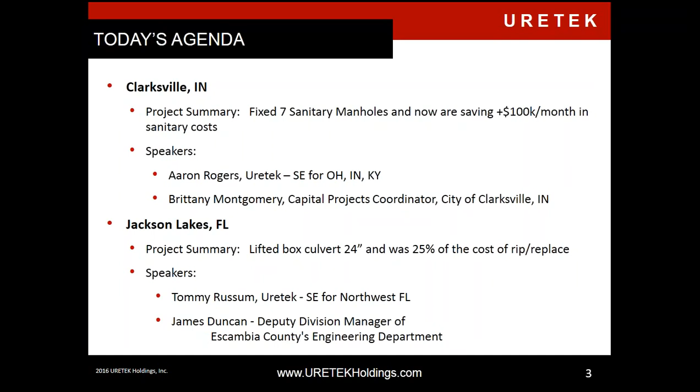Before I hand it over to Aaron Rogers to talk on Clarksville, Indiana, I want to just kind of give a brief intro on URETEK Holdings, who we are, and really what we have been focused on as of late. We are a contractor who does work in the infrastructure, commercial, residential, government markets. We are headquartered in Florida, and we operate in 31 states. What we've really been focused on as of late, it seems, and we hear it every day.

Just on the cover of USA Today yesterday was talking about how 2,000 different municipalities are impacted by lead. And then you can hear different stories about the aging infrastructure. So there's just a lot of news in the aging infrastructure taking place, and so we have found that to be a great opportunity for us to provide our solutions to help customers really spread their money further.

So instead of doing a remove replace, they can look at doing a rehabilitation.

So in working with our customers, we have found this inside outside approach to be the right one, where for a long time many customers were just looking at relining of the pipe or just treating the inside of a manhole. Many of you on this webinar may have seen this exact article from Trenchless Technologies before, because it was a project of the year in March 2012.

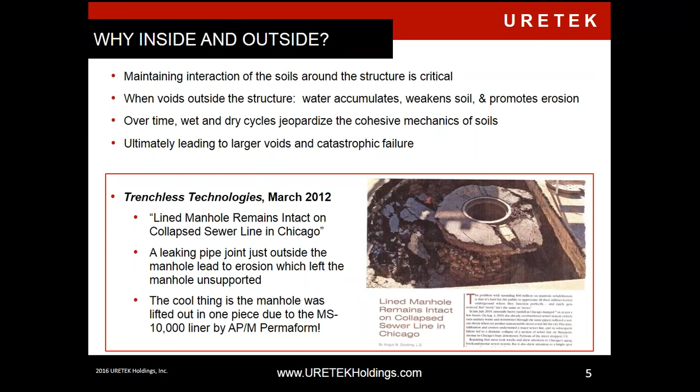The manhole in Chicago was relined with permacast, which is a solution that we offer. It is a 10,000 psi cementitious liner that was applied to the manhole, but because the outside of the structure was never taken care of, the structural integrity had compromised. You can see what happened in the picture. The soil envelope around the structure collapsed. So we have been really working with engineers, municipalities to go after infrastructure and take care of both the inside and the outside.

If you participated in our last webinar, this will be a brief recap, but for everyone else, I do want to share this slide. It is data points like this that is making us passionate about going after the infrastructure market.

George Kurz, an independent consultant, spent numerous years recently taking daily reports from different cities in Tennessee and came to the conclusion that 44% of the sanitary flow is actually inflow and infiltration.

He presented a variety of graphs showing how this flow was tied to rain as opposed to usage. The data continued to show that inflow and infiltration was going through the sanitary lines, making up 44%, which is a significant amount of money that then involves taxpayers having to pay for resizing sanitary lines or increased pumping rates.

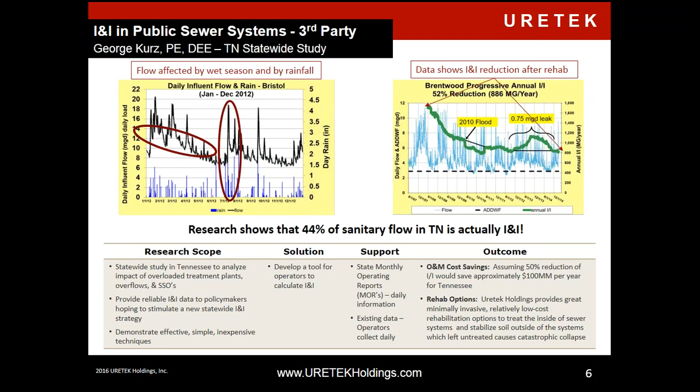Because of this water that should not be there having to be there, we will solve these different problems with a variety of methods. I'll give a brief overview of them, then we'll dive into these projects.

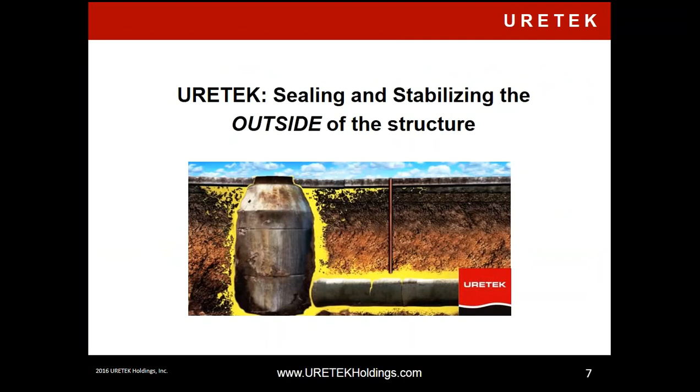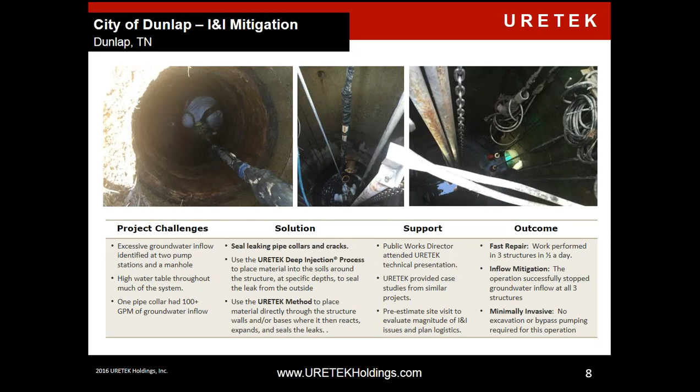Here's a recent project we've done in Dunlap, Tennessee, where we were able to take care of 3 different structures in just a half day's work. They've had significant reduction in their pumping costs as well, as we'll hear very briefly from the city of Clarksville. We've even had other infrastructure projects that have been just a nuisance to individuals.

In Chicago, Illinois, we took care of a tunnel that was having water coming through the joints. Using the chemical grout, injecting from the inside of the tunnel, we were able to stop their water inflow.

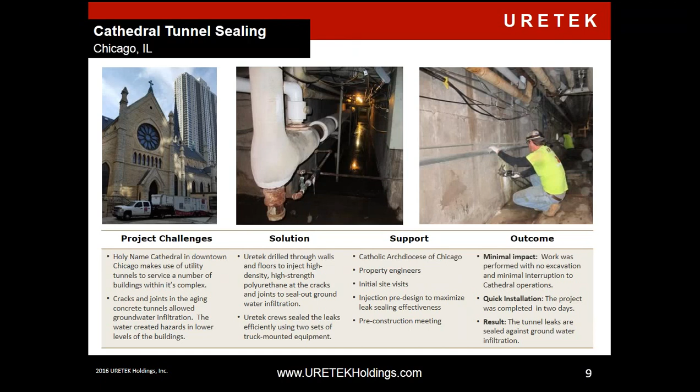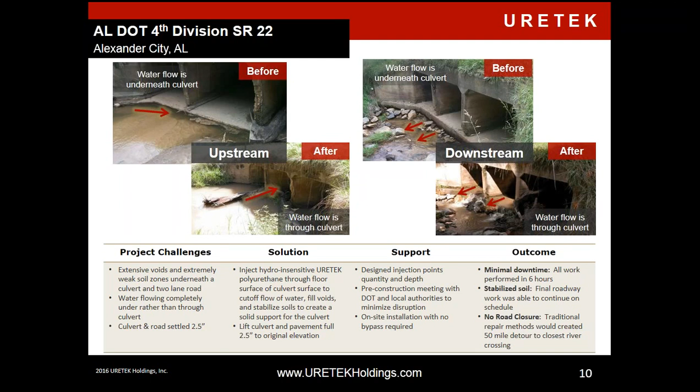By using chemical grout to create an injectable barrier at the entrance of this box culvert, we're able to get the water to go where it needs to go. Our material, due to its light weight, can also work in very old infrastructure, such as brick manholes.

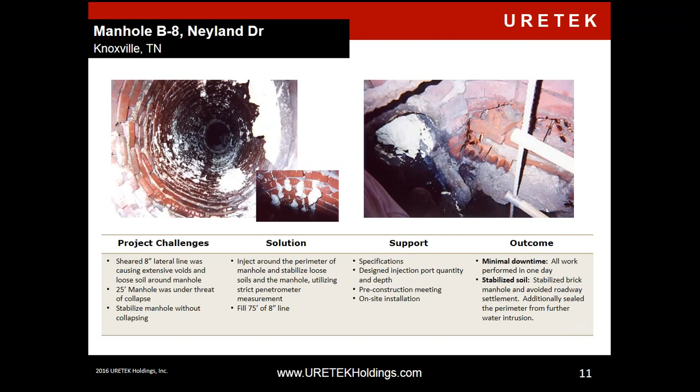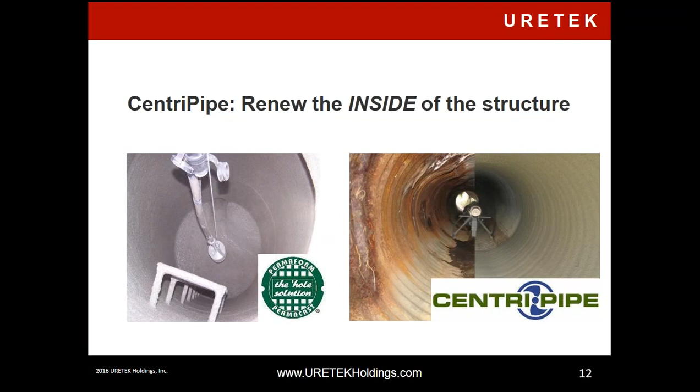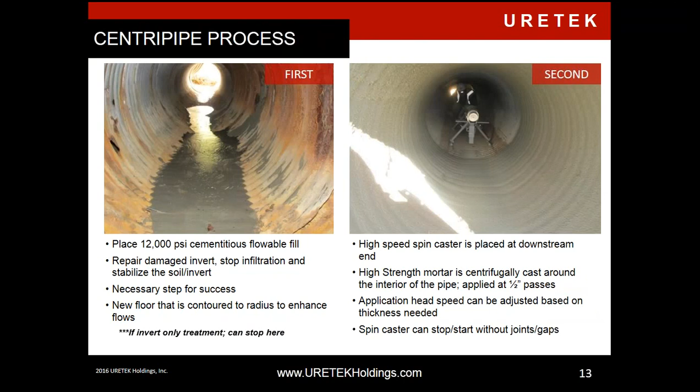We'll treat the invert, as shown in the picture on the left. You can see how we've treated the invert, giving it structural integrity back, and then we can either use a spinner or hand spray application to apply the mortar.

Recent project: we partnered with a company called Baker-Klein Engineering and worked on the Jacksonville airport, where we took care of the manholes and the I&I that was taking place there. We used a grout to take care of the I&I, and then used our Permacast to restore the inside of the manhole.

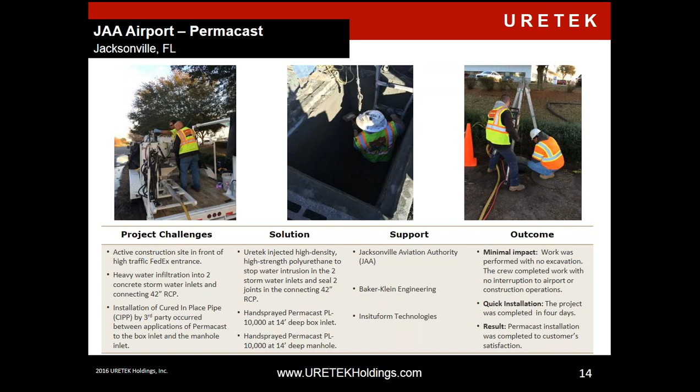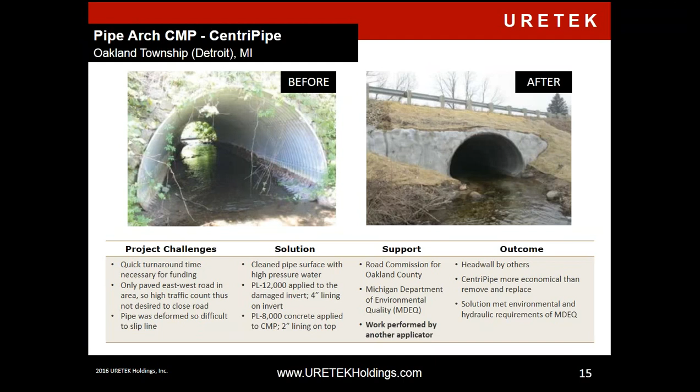The last item I'll mention before I hand it over to Aaron Rogers is Inversa. We showed some solutions for the outside and inside of what you can do once you know you have a problem. But we've partnered with a company, Inversa, who has brought to market technology like a CAT scan you'd see in a hospital.

They've basically brought that to the civil engineering world, where they can literally see through pipes using a CAT scan process. With Inversa's technology, you can partner with municipalities and even consultants helping municipalities to assess which pipes need to be rehabbed versus removed and replaced, allowing for a prioritization of asset management.

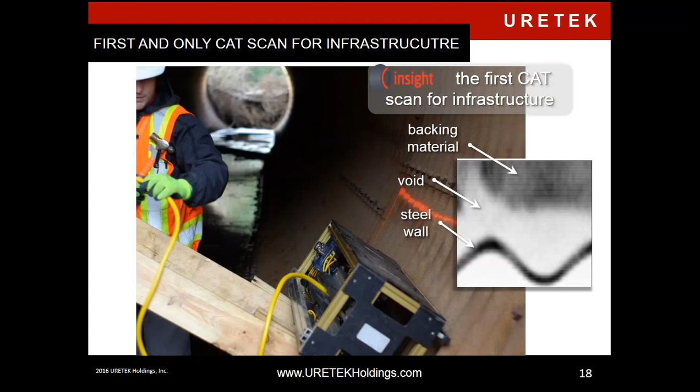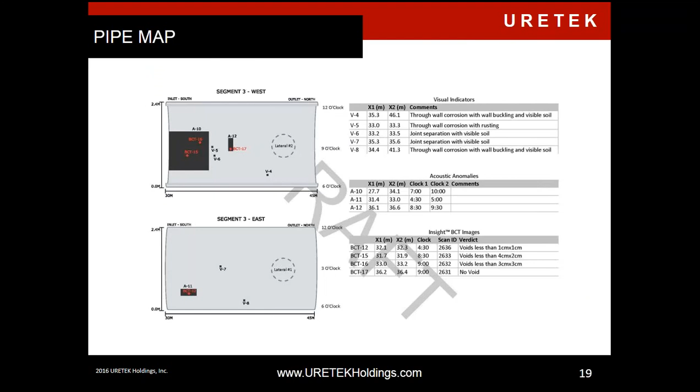Inversa will then put together a map of what the pipe looks like, areas that are a concern and areas that are not. The municipality receives this map along with CAT scan pictures like this one. If you look at the picture on the left, there's no void, no concern in that area, but then you can start to see the transition to a void, and then the actual void itself. That wavy line is the corrugation of the corrugated metal pipe, and you can see there's a large void right there.

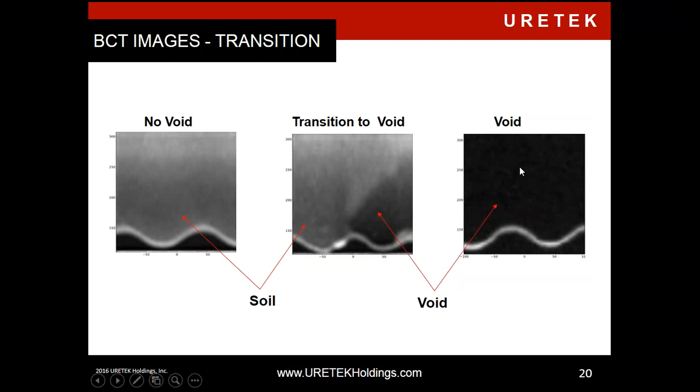We'll be talking about that on our next webinar, May 6th, which we'll cover at the end. Now I'd like to hand it over to Aaron Rogers, who will be talking about the Clarksville, Indiana project.

Morning, everyone. Like Corey said, my name is Aaron Rogers, and I was the project manager for a project we did just north of Louisville for the town of Clarksville. We reduced I&I and had some really great outcomes with that, so that's the purpose of this section of the presentation today.

I'm also the sales engineer for URETEK Holdings in the area, and today we also have Brittany Montgomery on the webinar. She's the capital project coordinator for the town of Clarksville, and was the point of contact and project manager throughout this project. I'm going to talk about the construction portion, and Brittany is going to cover the whole project from the city's perspective—costs, other solutions they looked at, and the outcome and finances. So we're going to start with Brittany. Brittany, I'll go ahead and pass it over to you.

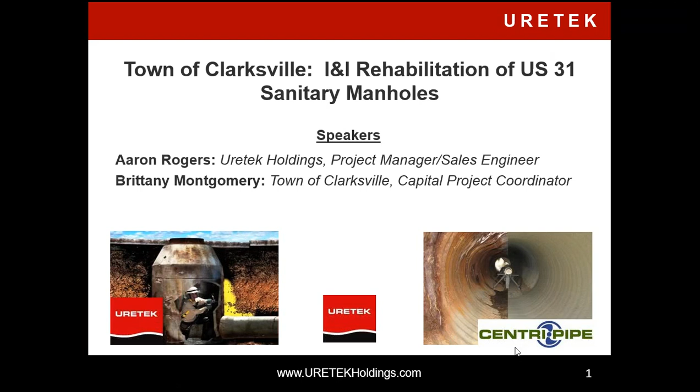Thanks, Aaron. As Aaron just said, my name is Brittany Montgomery. I'm with the town of Clarksville, and I manage capital projects on our utilities and such.

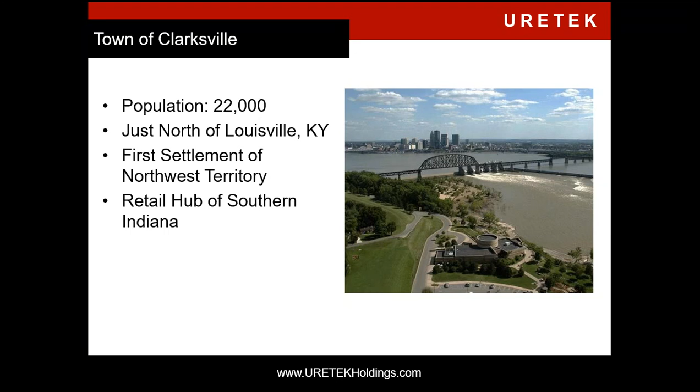So real quickly, an overview of the town of Clarksville. We have a population of about 22,000 people, and we're literally just north of Louisville, Kentucky. This picture shows our river view of the city of Louisville. We're relatively small in population compared to our retail sector—we're considered the retail hub of southern Indiana. While our population is about 22,000, on weekends we serve a population that quadruples to closer to about 70,000 due to our retail sector. The other interesting thing is that we're the first settlement of the Northwest Territory, the first settlement north of the Ohio River. So we have a long history and a lot of very old infrastructure, but also a lot of new development we have to continue to work with.

Just a quick overview of our wastewater treatment plant system. We have a plant that was built in 1985, and we just replaced it this past year—in June of 2015, our new plant went online. It's one of the last trickling filter plants in the state of Indiana. Our average daily flow through the plant is right around 3 million gallons, typical for a community our size. However, during rain events we would hit a peak of about 12 million gallons and overflow into the residential neighborhood across the street out of manholes.

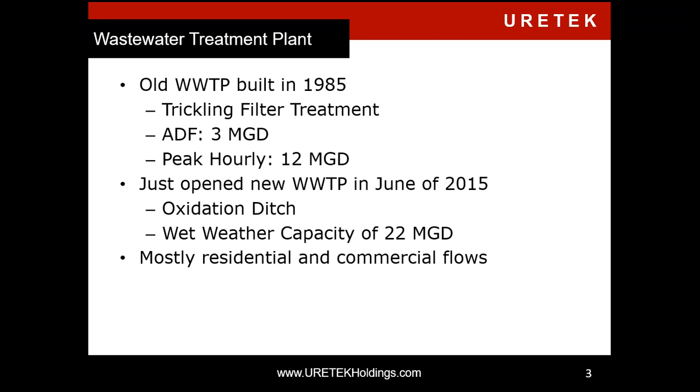When we opened our new plant in June of '15, we went to an oxidation ditch—much cleaner water, better ability to treat wet weather—and we also went to a wet weather capacity of 22 MGD, officially rated. Within 12 hours of putting the new plant online, we got a massive rainstorm and actually put 24 MGD through our plant, the first time we'd ever done that without overflowing. We don't have any industry—our last industry left in 2006, so we're strictly residential and commercial flows. We have your typical warehousing and such, but we don't have a need for pretreatment or any real industrial facilities to worry about.

Our collection system is typical for the Midwest. We have 72 miles of lines. We are very flat, except for the areas right at the river. So we have 35 pump stations. We actually operate on a header system where one pump station pumps into a different one, and we have 3 main pump stations that then pump into a joint gravity line that flows directly into the plant.

Our system's old. We do not technically have a combined sewer system. We have separate sanitary and storm systems. Those were separated out when the initial wastewater treatment facilities came online in the 50s. Most of our lines are clay. We do have some concrete and some PVC in our newer developed areas.

But I would say about 60 to 70% of our lines are the old clay lines. Our smallest lines that the town actually will take care of are 8-inch, and our largest lines are 36. The average is about 8 to 12, except for more of our collectors. Our lines range in age. We have some that go back to more the initial development of sanitary sewer systems that are 100+ years, that when they separated everything out, continued to stay in line. But our average age is about 40 years. So we are facing the same thing that every other older community in particular faces, in the fact that we have old lines, a lot of I&I problems.

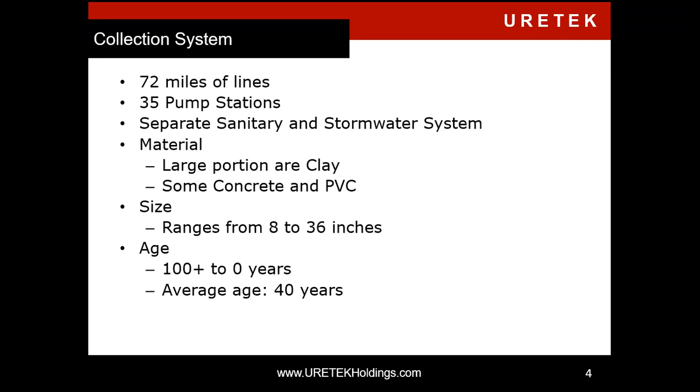And I'm going to focus in particular on the area that we're going to be talking about where we did these repairs through URETEK. In 2007, the town started to notice increasing high levels at what's called Pump Station 10. Pump Station 10 actually has 5 different pump stations that go into it and service areas that go into it. But the issue with Pump Station 10 is it's a very rapidly growing retail area.

This is an area, and it continues to grow today, where once a month we have new retail open. We have Walmart open, we have Target, we have Bass Pro come on. And suddenly the town itself was approving capacity letters for these new developments, but during heavy rainfalls we are seeing consistently high levels at Pump Station 10, and we are seeing consistent basement backups in areas in the neighborhoods that surrounded this development.

A study was commissioned by HMB Engineers, who are a local engineering firm, mainly in the Louisville, Kentucky area. And their results came back and said, you need to construct a new pump station. They don't know where the flows come from, but there's just too much flow, and you need to construct a new pump station and take some of the flow away from the current system and put it directly into the plant. However, as many communities at the time, our rates were very low, and the cost was not something that the council felt like they could move forward with.

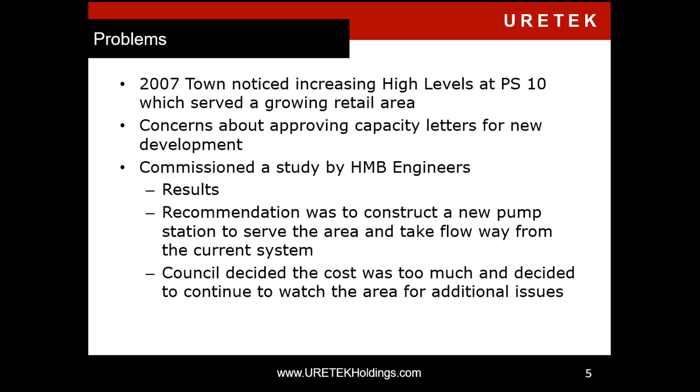However, we continued to have problems in the area, and not just in that area, but throughout the town. As you could see before, during real dry days, we'll actually just put 2 MGD through our plant. We just don't have that much flow. But during rainy events, we will put 12, and then we come out. We had some pump stations that were seeing a 500% increase in our flows during rain.

And IDEM, which is the Indiana Department of Environmental Management, handles all permitting on behalf of the EPA in Indiana, started putting pressure on the town. You've got to do something to reduce your overflows. You've got to do something.

Ironically, in 2011, the town was hit with a massive flood event, which caused our effluent line from the treatment plant to the Ohio River to fail completely. Because of that, there was a need suddenly to relocate our effluent line. We had to rebuild, completing the new treatment plant that just went online.

And so the town entered into an agreed order with IDEM. I'm always careful to say we never entered into a consent decree. We never really had IDEM come down or EPA come down and say you have to do something. But because of the continued issues we had with overflows, IDEM snuck into our agreed order this idea that you had to spend $500,000 a year to reduce I&I.

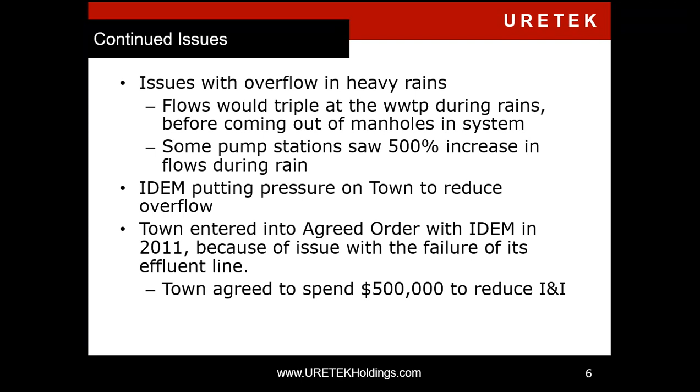We had to go out and we had to start figuring out these problems. They weren't going to let us just kind of scapegoat on it. We weren't really in trouble, but they used this as an option to force the town to really start to deal with the problems in the collection system. And while at the time we weren't real sure how we felt about it, it worked out.

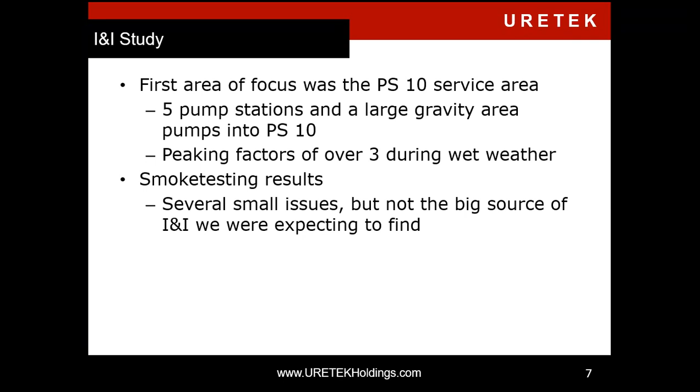Our first area of focus was the pump station 10 service area. That area has 5 pump stations and a large gravity area, and is currently about 80% commercial and 20% residential. During wet weather, we peak over 3. We had the area smoke tested, expecting to find that we were draining a field somewhere or something big, but we didn't find anything in particular. We just kept finding small areas. So we decided to take the next step and do something more.

In the spring of 2014, there was an announcement that additional development was coming. They were going to develop some out parcels as well as put in a new nursing facility and retirement home in that area. At that point, we said we can't continue to sign capacity letters knowing that as more flow keeps going on, we have the potential to cause basement backups in our neighborhoods. We contracted Gripp Incorporated to complete a flow monitoring study. Gripp is a local, Indianapolis-based community firm that does a lot of our flow monitoring.

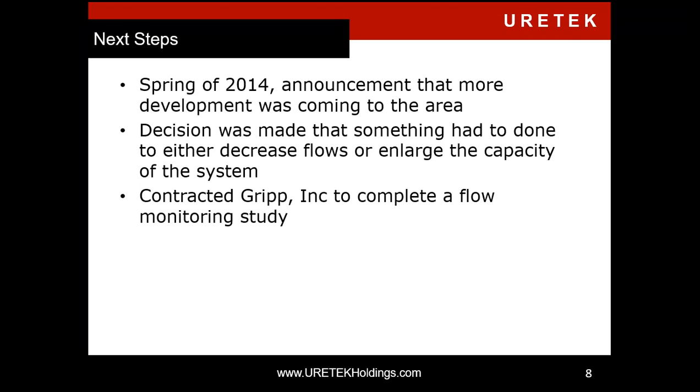So we commissioned the flow study, and we started at pump station 10, and worked upstream, moving the monitors. We used 2 meters at a time. After we get a good rain event, we look at them, then move them again. Just trying to track where it's coming from.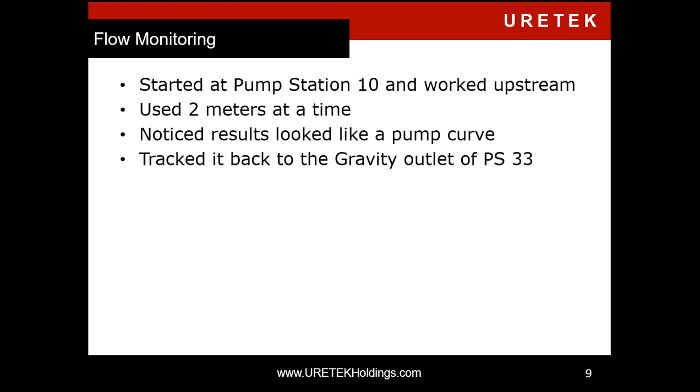What we noticed was it looked like a pump curve, so we were thinking one of the malls was pumping to us. They've got some pump connected, so we moved it past where they would have connected to the system. What we found out was that we tracked it back to the gravity outlet of pump station 33. What we thought was an issue with one of our commercial developers actually ended up being an issue on the town side.

Pump station 33 is actually a station that was built in 2003. It's not an old station, and the line itself is not old. It was built in a swampy area next to I-65, which forms our eastern border here in the town of Clarksville. There were significant problems when the pump station and those lines were actually built. The initial contractor walked off the job and ended up going bankrupt because of the high groundwater conditions.

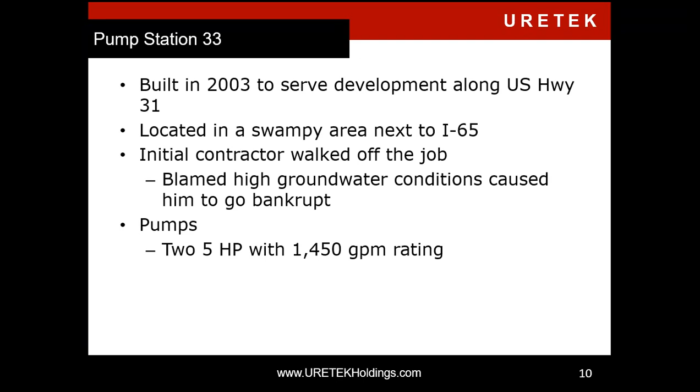When I say we're right off 65, I mean 65 kind of drains. They have 6 lanes at this point of I-65, and it all drains into this area where the pump station was. The pump station has two 5-horsepower pumps rated at 1,450 gallons per minute. We only run 1 pump at a time. So it's a pretty typical pump station, but we had some issues from the beginning just with the lines.

So our next step was to go out and have the line TV'd. Let's TV the line and see what happens. We were really surprised at the results. Overall, the pipe itself was in good condition. However, the manholes and the joints were just leaking.

We had the TV done during a dry period. Things were actually really dry, not spring. You can see that even as the ground was dry, when you get down in the manholes, here's the water just seeping in. It was going 24/7, not just during rain events. So we're like, okay, well, this is our problem. We have to do something to reduce it.

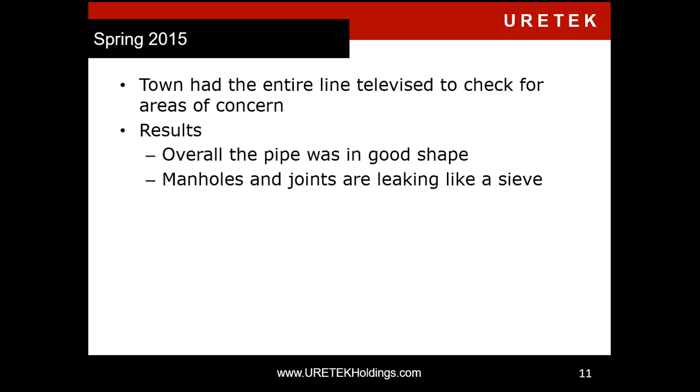The town examined several different solutions. Typically, we would have said let's line the manholes. We got an estimated cost, and it would cost us about $100,000. These are really deep manholes, and we have access issues back there. We actually had a lot of issues just being able to get back there and TV the line because of where the location is. Also, no one could really give us a guarantee based on what they were seeing with the soil conditions that we could line the manholes and not have escape around the liners.

We looked at what happens if we were to move the line from behind the businesses. This is off between Highway 31 and I-65. What happens if we were to move them out closer to Highway 31? Well, there's significant cost with that, and the businesses wouldn't care for that, as well as we would probably have to actually put it in Highway 31, and we'd still have to run a pipe under 65, which is how it gets into the pump station 10 area.

We looked also at just general CIPP. The line itself really didn't need it; we just needed the manholes. So we just got to thinking, okay, what else can we do? There's got to be some better option here.

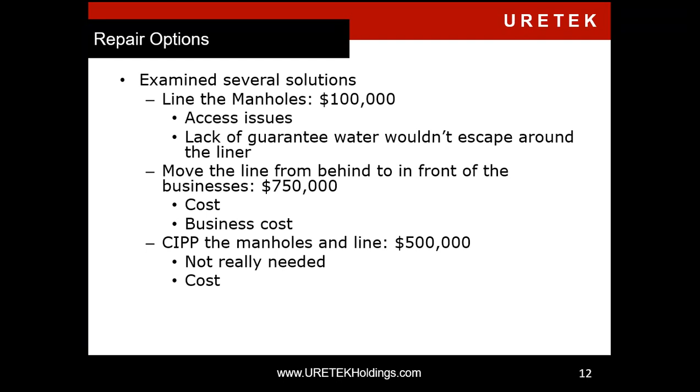Let's see. So the town's engineers, which are HDR Incorporated, they have their Louisville office. They had just had a lunch and learn from URETEK Holdings, and they said, hey, why don't we look at this? So he sent the results to Aaron. He reviewed them and said he thought it would be a good fit.

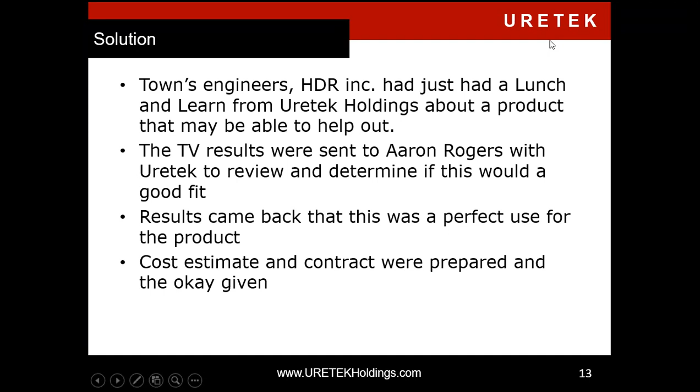And we're like, okay, this has got to be better than any other option. They gave us a cost estimate, and we approved it on the spot pretty well. We said, we've got to do this. What can it hurt? So the contract was prepared, and the okay was given. And we went ahead and moved forward with the repair. I'm going to turn it over to Aaron now to talk about what they actually did, what repairs they did, and how it ended up working. And I'll come back and tell you what the end results were for the town in just a second.

Thanks, Brittany. Give me 1 second here.

There we go. Yeah, so as Brittany said, it was between HDR Engineering out of Louisville and the city of Clarksville. Kind of came together after that lunch and learn and agreed and liked our product and wanted to move forward with our solution. So first thing I'm going to talk about is specifically what the solution was.

So during that expansion, first the polyurethane is traveling into the voids, but anywhere that there is I&I or gushers, that polyurethane still in a liquid form is going to be carried in that flow through the faulted locations in the structure. So because it sets up in about 30 seconds, it actually begins to set up as it gets carried through that faulted location. And what forms is outcroppings of our material right along that fault. And once we see the outcroppings, we know that we now have what we call positive seal, a seal that's now complete all through that fault.

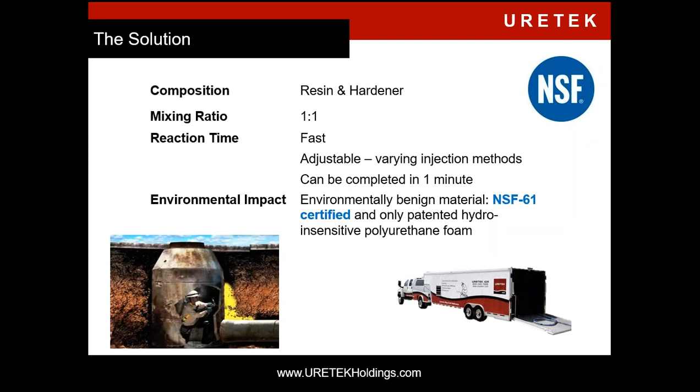And a really important characteristic of the material for this job was that it's hydro-insensitive. That just means it's going to behave the same way in a bone-dry condition as it does in a saturated condition, or even beneath the groundwater table. So obviously with I&I and working around voids in the manholes, very critical to have that. And it's also NSF 61 certified, which means you can use it around drinking water, which also means it's environmentally inert. And another piece that made the solution valuable was that we didn't have to bypass. We can do this with flow still in the system.

So the project itself, basically we were given the CCTV results, as Brittany said, from the town, and we used that to design our solution. If you look at the table at the top of the slide, you can see all the manholes that we were going to treat. So there's 7 manholes, described as either major or minor repairs. A column over, you see the dimensions. They're all 4 foot in diameter, but they're mostly deep. There was a 12 foot and a 7 foot, but everything else was 17, 18, and then 21. And 21 was the one right next to the lift station.

And then the repair types, there were 2 defects that were in almost every manhole. Number 1, the precast joints, and you can see that in the picture in the bottom right. Water was traveling through there, creating gushers. And the second defect was the pipe joint, the intersection between the 12-inch sanitary PVC line and the precast concrete manhole structure.

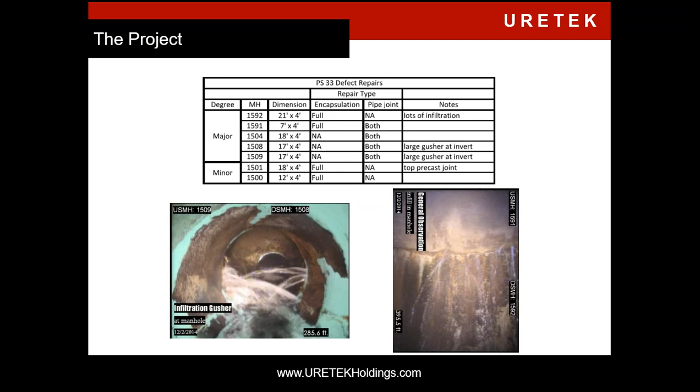And the picture on the bottom left corner, this is the CCTV going upstream in the line, coming right up to the actual manhole. So you can see right at that joint the high pressures of that gusher. And again, the reason we got high pressures and large gushers is we have a high water table and deep manholes. So hydrostatic pressure builds up.

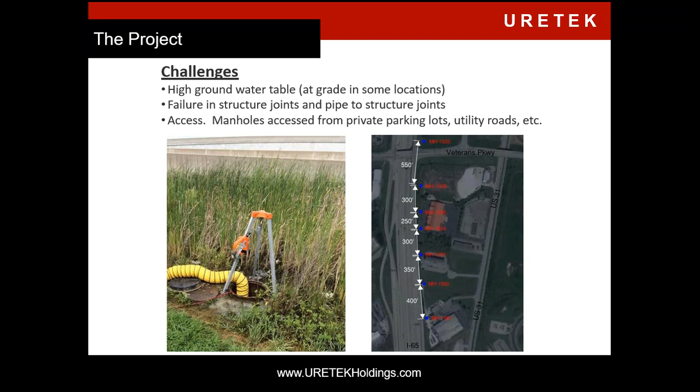And then really the most challenging manhole we had was the one that was second to the top of that picture. You can see it's the only one that doesn't have a business development near it, but you can actually see the utility access road. So we had to use that, and the edge of that was in the swamp, and we had to get real close on the edge and kind of maneuver the truck around so that we were able to access that manhole. But our construction crews did a great job and got our truck back, and we were able to completely access that manhole.

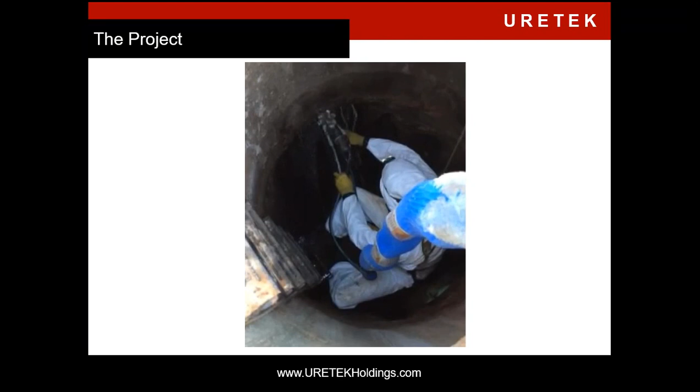And this is a video. So yeah, if you look, you can see the I&I coming through right where the gun is inserted into the wall. And what we're doing is injecting the polyurethane behind that wall. It's filling the void and starting to seal. And you can already see the flow is reducing. And keep an eye on the 7, 8 o'clock position on the ladder area.

What you'll see is I&I begin to form there, because what happens is, as you can imagine, water takes the path of least resistance. So as that happens, you're going to get new locations of I&I. So we always recommend to clients to encapsulate the full manhole with polyurethane, not just seal the one joint. And that was the case of what we did on all 7 manholes, was encapsulate the entire manhole, but you can really see it spraying now.

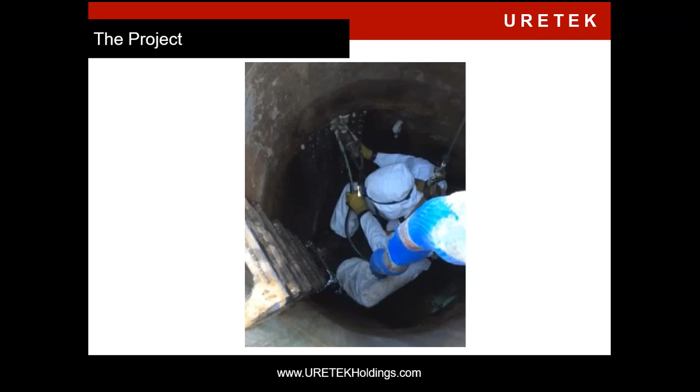And then just to describe a couple things in the picture there, you can see obviously our operator, and he is on a pulley system, and you can see the gun is inserted into the wall, and you can actually see the two separate tubes coming into the gun. Those are the separate materials, and that just gives you an idea of what the setup is here. And this was actually in the deepest manhole, but ironically, the gusher is only about 4 or 5 feet from grade.

So a couple before and after pictures here. On the left, you can see at the invert, this is a lateral to manhole connection. You can see that we were able to completely stop that flow. And then the pictures to the right, before and after, this is actually the same exact joint that I just showed in the video. And what you see in the after picture is the outcropping, and I wanted to include that so you can see what it looks like when we get that outcropping and we know we have positive seal. And we clean that up before we move off site.

So the work was completed in a day and a half. We did successfully stop all of the precast and lateral to manhole joints, all the I&I. And we didn't have to bypass pump, and actually we finished this project under budget. So I'm going to pass this back over to Brittany, and she's going to talk about kind of the outcome for the town as far as cost savings and different things like that.

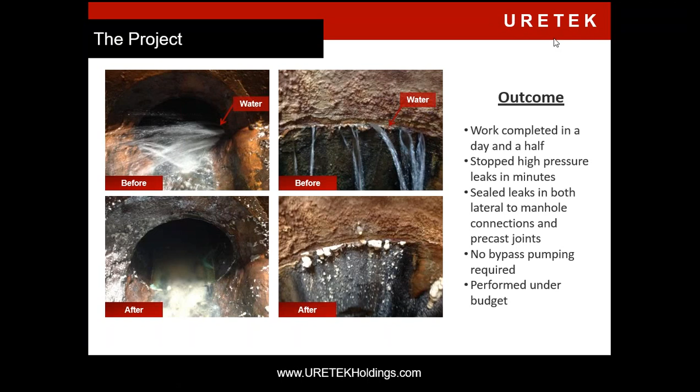Thanks, Aaron. I'm just going to finish up the presentation by telling you what our costs were and then what we saw in our savings. The total cost to the town was just under $75,000. Our largest cost was the flow monitoring cost, and that's because we were flow monitoring for about 4 months, and that's some significant cost. We don't have all those capabilities in-house. So those were at $54,000.

Our engineering: we paid HDR to look at some of the options and also to provide the information to Aaron and all associated oversight of that. It was just around $4,000. And then our actual URETEK costs were $16,306. So think about that. $16,000, as you guys know, you can't really do a point repair for that. We were able to fix all of our problems. As Aaron said, it came under budget.

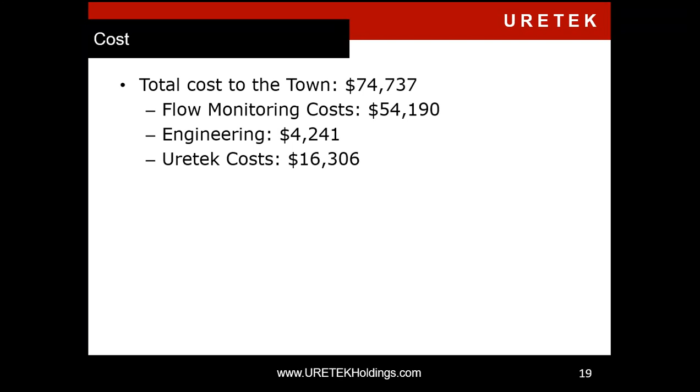Initially, we were thinking it was going to cost between 20 and 25, but they bill us based on what they actually do, which is nice. And so it came back and ended up only costing $16,306. And we were taken aback. After we got all these costs together, the next step was, let's see what really happened. Do we see any decrease? And it was immediate. We did this work in the summer of 2015, and we saw an immediate decrease.

We had a rain event not too long after, and suddenly we didn't have the high levels at 10. We didn't have the high levels at 33. We were wondering, oh my goodness, this is amazing. So then we went back and did the math, and what we saw was a decrease of over 10 million gallons a month being pumped. We don't have flow meters on all of our pump stations, so it's based on our hour meters. But we compared the same time frames exactly, and we also compared wet weather versus dry weather, and saw a decrease of 10 million gallons at both of the pump stations.

We were just amazed. I'm not going to lie, we presented the information to the council, and they said, we need to double check these. So we had an outside engineering firm look at the data, and it was right. We based our cost savings on what we charge our customers, our regular metered rate. We estimate it saved us $94,000 a month, and that's just based on the water treatment side of it. We also no longer had the need for a new pump station to service that area. That need is gone. We have adequate capacity on the system.

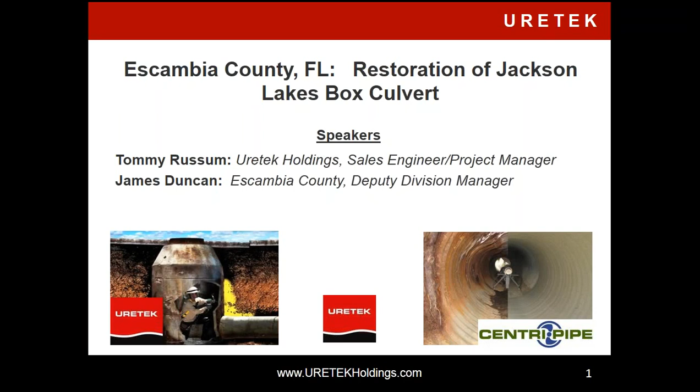Escambia County is the westernmost county in the state of Florida. They have a population as of 2013 of about 305,000, and it was one of the first counties, along with St. Johns County, in the state of Florida, back on July 21st, 1821. We are also home of the Blue Angels, which is pretty neat.

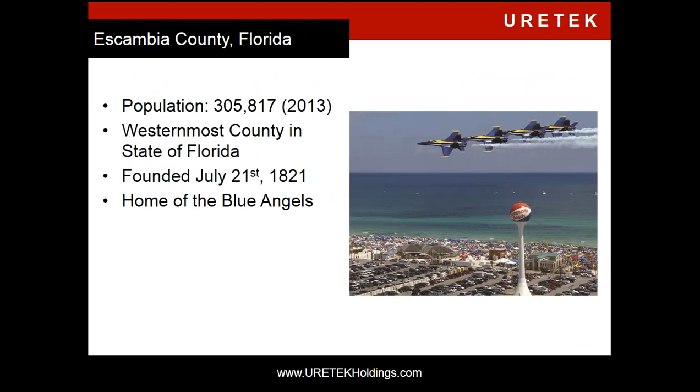A little bit of history on the box culvert itself: they're called Jackson Lakes box culverts. It's a quadruple barrel box culvert used to equalize the two southernmost lakes. As the lakes rise, it dumps the water into the adjacent creek, and then it flows out and dumps into Bayou Chico.

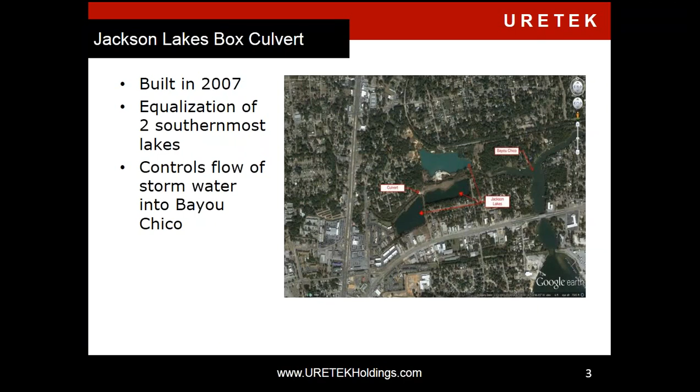The original issue started back in 2012 when we had a severe storm that caused some flooding. This flooding actually breached the top of the culvert and caused erosion of the berm separating the lakes from the creek. At that point, the county tasked a local engineering company to do an assessment and develop repair plans.

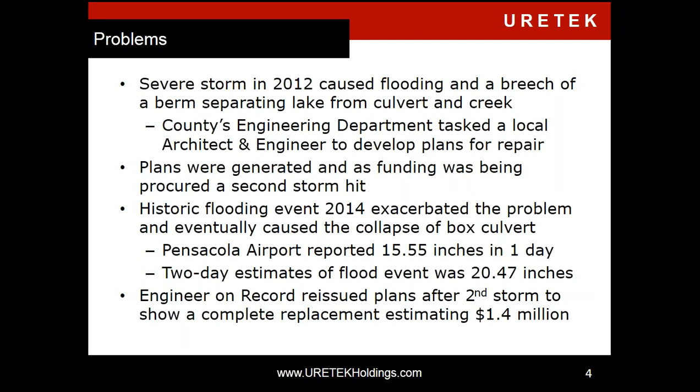Those plans were generated, and as funding was being procured, we had a historic flooding event in 2014. This exacerbated the problem and eventually caused the collapse of the culvert. Once it collapsed, there were reassessments of the plans, and the engineer on record recommended a complete replacement of the culvert, which came to a budget of about $1.4 million.

Those funds weren't available to actually do a complete rip and replace, so they had to assess the situation and try to come up with another approach to this problem.

Along the timeline, back in December 2013 we conducted a lunch and learn with Hatch Mott MacDonald. Subsequent projects completed with them gave them confidence in what we were doing. Fast forward to April 2014, we did a lunch and learn with Escambia County. Alongside both Hatch Mott and Escambia, we completed a couple of projects that gave them more reassurance that we were capable of handling what this Jackson Lakes culvert needed.

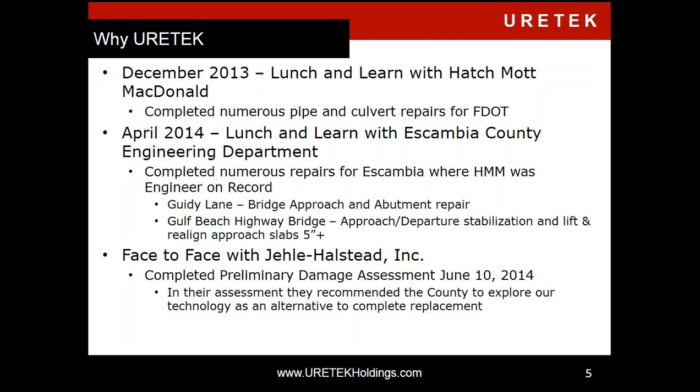A local engineering company also did a preliminary damage assessment, which recommended to the county that they assess a technology such as ours as an alternative method other than complete replacement.

So I conducted a second site visit with Escambia County, collected the necessary information, designed a repair, attached a budget to the project, and we delivered it in December of 2014.

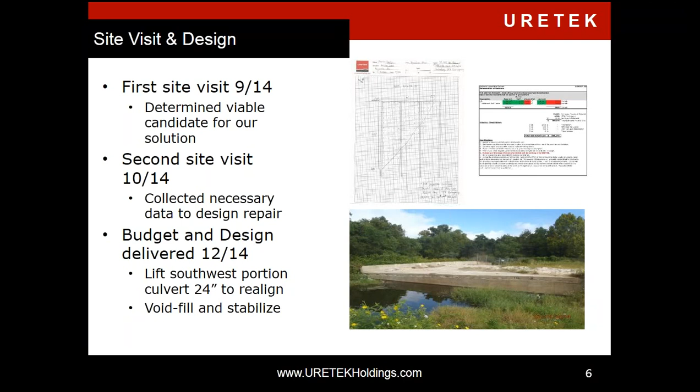Fast forward again to July 2015, it was put out to competitive bid. URETEK was the low bidder, and we broke ground pretty much in November 2015.

Several issues came up on this particular project. We had to get subcontractors on site early to complete the massive dewatering job. We had to install a cofferdam, make sure proper sediment barriers were in place, and remove the wing walls.

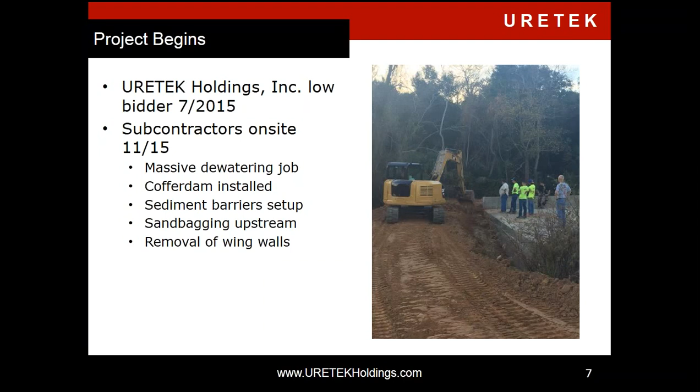URETEK's crews arrived on site in December 2015, and as you can see, we're assessing the ground condition. It was a very mucky environment, real wet — the clays caused some of the guys to sink almost up to their hips in some areas. But we started the injection process on December 1st, 2015.

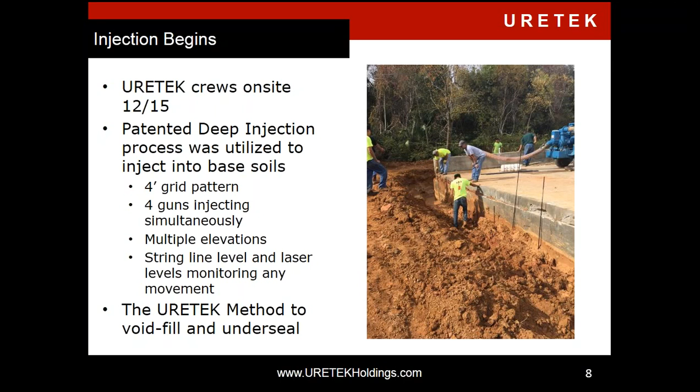We installed a 4-foot grid pattern at multiple depths on the side of the culvert, as well as a complete grid pattern through the interior of 3 different boxes of the culvert itself. We used laser leveling, as well as a string line across from the high end to the low end, to monitor the lift. As you can see in these photos, this initial photo shows the extent of the drop on the southwest portion of the culvert.

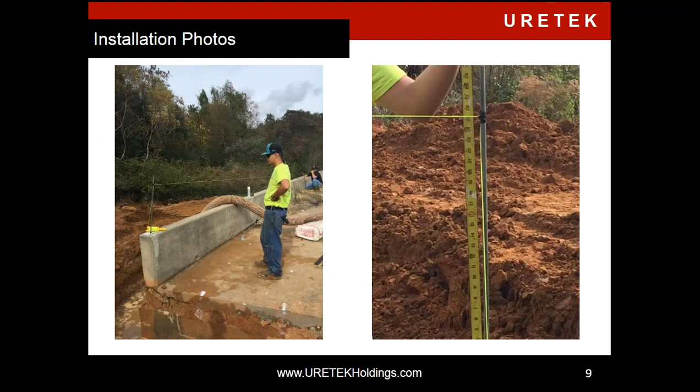25 inches at its worst. Here's another view from the other end. You can kind of see the drop off and the extent of the water that we were having to dewater.

Even with the cofferdam, some of the issues we had was there was water coming in all over the place. The picture to the left is showing you

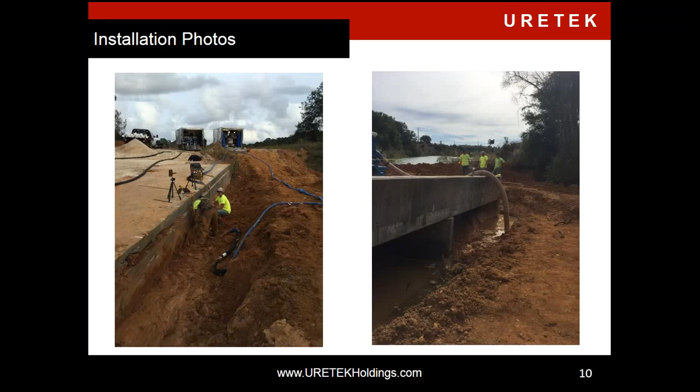Our rigs. It's basically all you need to get us going. Aaron has already done a pretty good job of explaining our material. One of the great things about our application is even if it's for an application like Aaron just described, or this application here, it's the same exact material. There's no really changing or guesswork in what we're doing.

You see the guy on the left there is actually injecting to help contain some of the material. Here's a good shot of our guys showing our injections on our grid pattern inside with the laser levels. They're monitoring. We approach this lift with 2 rigs, and it has the capabilities of using 4 guns simultaneously.

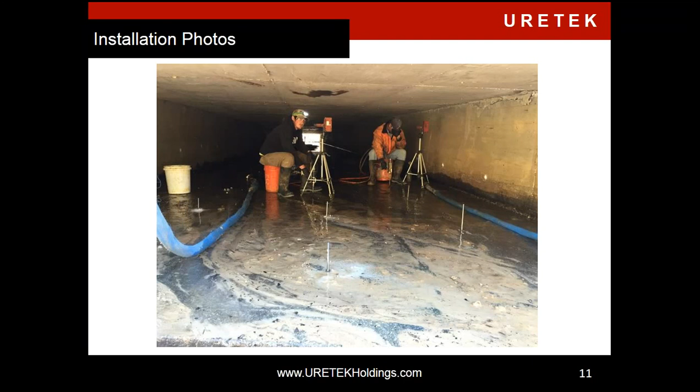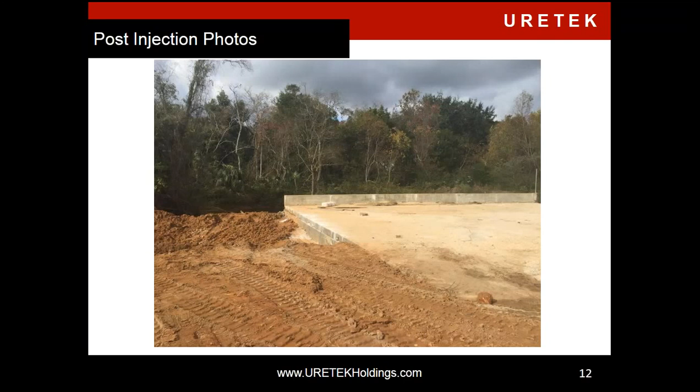Now, as you can see here, we have the culvert lifted back up into place, and we're starting to use some of that backfill to actually bring back the area to where the creek is able to flow, and it's preventing the lake from overflowing into the washed out area that was previously there.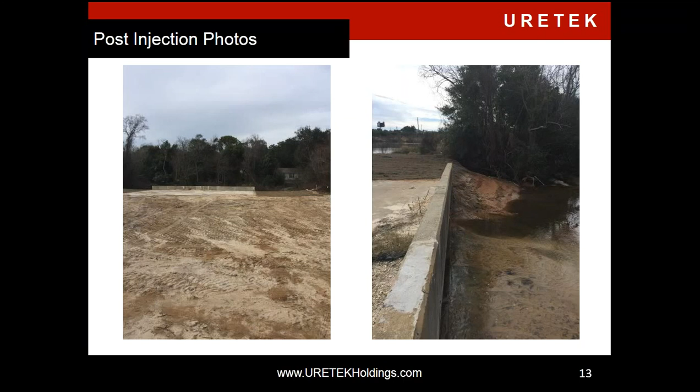Here's kind of some other side view pictures, and a little bit further back, we since have installed a fence, some sodding, and the one thing about this is the original budget of $1.4 million, we were able to go out there, lift the culvert, stabilize the ground underneath the culvert, do some preventative maintenance with some injectable barriers on both sides of the culvert, as well as upstream to prevent any water from flowing up underneath the culvert and eroding away the soils and kind of undermining the work we've done.

As well as sod, fence. We even installed anchors to attach the cap of the culvert back to the walls of the culvert, and the masonry repairs for under a quarter of the original budget.

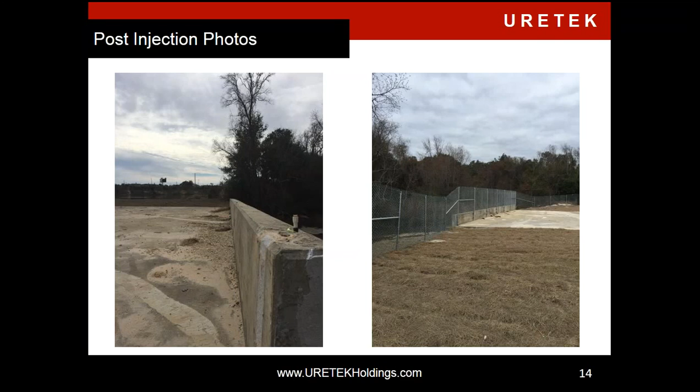Just kind of a recap, some of the design challenges we had were there was 20 inches of rain in almost less than 36 hours. So we know we're going to get heavy rain down here, so we want to make sure that we're not going to continue to have this become a problem in the future. So what we did is preventative maintenance.

So we knew we were dealing with about 2 foot of void space across, estimated at about 1,600 square feet. So we went onto the right side of the culvert and injected down below the mud line to ensure that we had deterred that water in the future if the flow had ever changed in another flood event.

We had the backing of the county as well as dewatering professionals and the environmental group H2O.

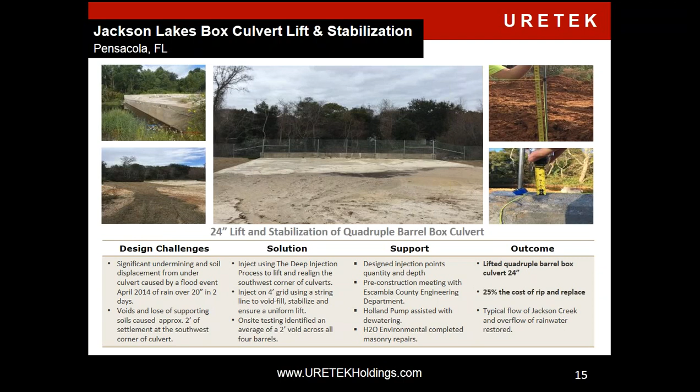Here's some of the specifics of the job, and this type of information is readily available, as well as I do have James Duncan's information if you want to contact him directly to have him answer any particular questions about the county's aspect.

But Corey, I can open it up to questions now and try to answer any questions.

The lift itself, we started December 1st, 2015, and the complete 24-inch lift, the void filling of 2+ feet, and the stabilization was completed in 5 working days.

All right, thanks. We do have a few questions. So the first question is, were there any problems with breaking the suction between the bottom of the culvert and the top of the surrounding soils? And maybe even go further with that, the water underneath, right?

Go ahead, please. Yeah, that's a perfect question, and that really is what takes the most amount of the material, is breaking that suction. You could actually feel it when you were on the surface, because a lot of the guys, as you can see the picture of the right, were standing on top of the culvert as we were lifting, as well as the county's inspectors.